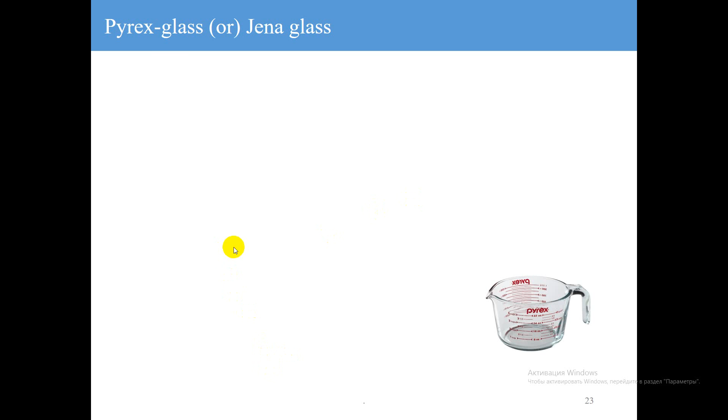Hello everyone. The last lesson on the topic glass. So let's consider Pyrex glass or Jena glass.

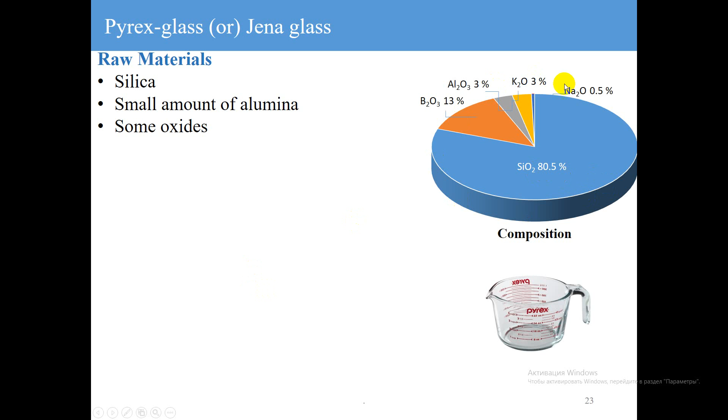Raw materials: silica, a small amount of alumina, and some oxides. Here you can see the composition of raw material and properties.

Substitution of alkali and basic alkali earth oxides of the soda glasses by boron and aluminium oxides results in a low thermal coefficient, high softening point, and excellent resistivity, making it shock proof. Of course, it also has high chemical resistance.

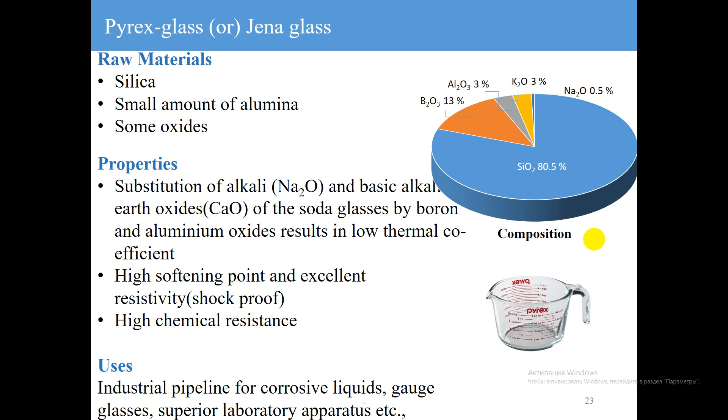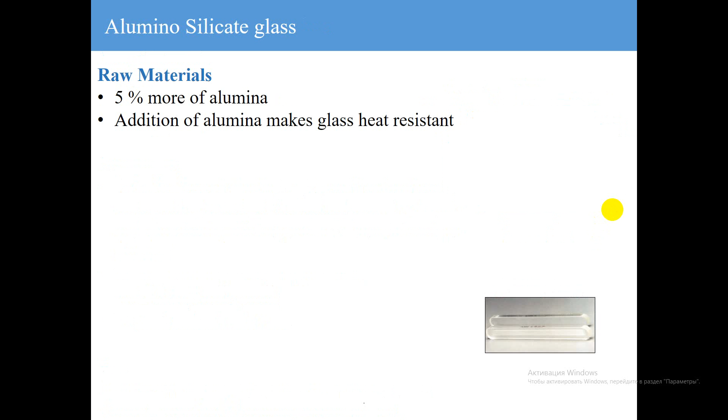Aluminosilicate glass. Raw materials: 5% more of alumina. Addition of alumina makes the glass heat resistant.

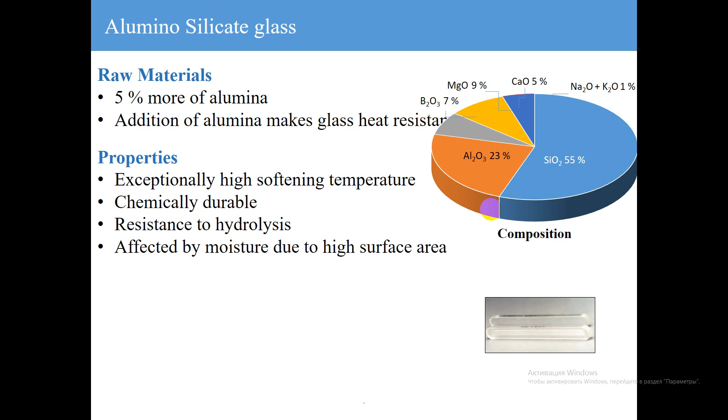Composition of aluminosilicate glass you can see here. Properties: exceptionally high softening temperature, chemically durable, resistance to hydrolysis, affected by moisture due to high surface area. Uses: high pressure mercury discharge tubes, chemical combustion tubes, specific domestic equipments, and fiber glass.

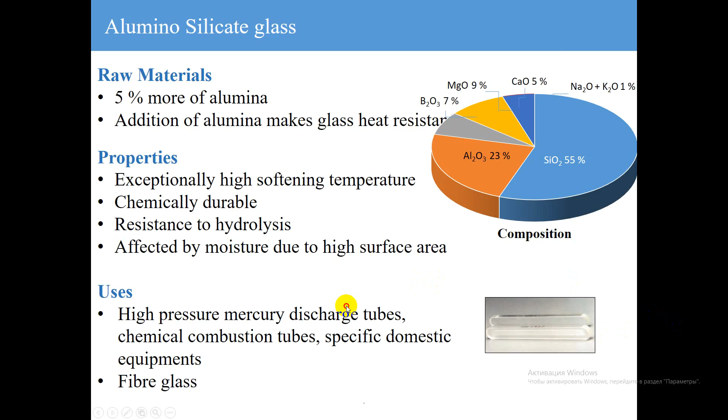Optical quartz and opal glass. Optical glass. Raw material: phosphorus and lead silicate. Properties: low melting point, soft, chemical resistance, durability lesser than ordinary glasses. Uses: optical lenses.

Quartz glass. Raw material: crystalline silica fused at 1900 degrees Celsius. Properties: outstanding resistance to thermal shock and chemicals. Uses: special lab ware, crucibles, reaction tubes.

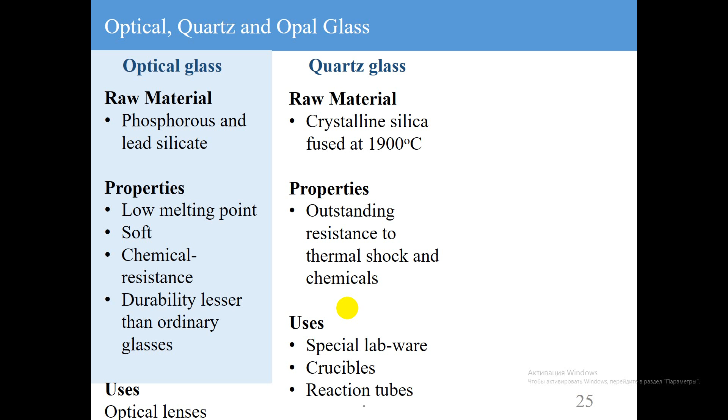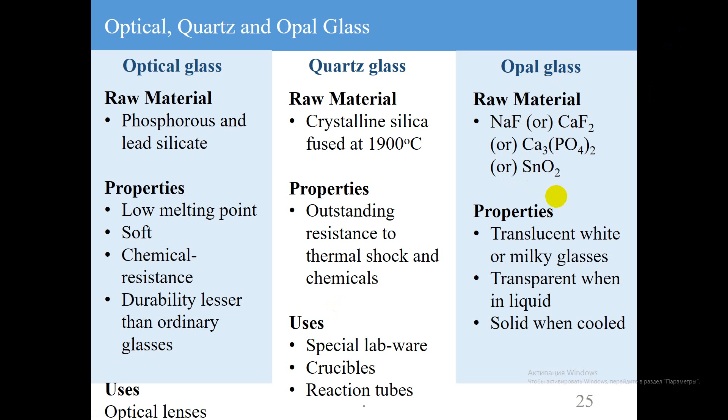Opal glass. Raw material you can see here, and properties: translucent white or milky glasses, transparent when in liquid, solid when cooled.

And now the topic glazing. What is glazing? Glazing, which derives from the Middle English for glass, is a part of a wall or window made of glass. Glazing is when you paint a thin layer of minerals and glass onto a fired or unfired ceramic piece.

The act of installing glass in windows, doors, or fixed openings. In practice, it would be the actual installation of a piece of glass within a frame.

History: glazes have been discovered to have been used in the decoration of ceramics. As far back as the early Egyptian period, powdered glass was originally used as the base of historic glazes. Minerals and water-soluble salts were added which altered the color and texture of the final product.

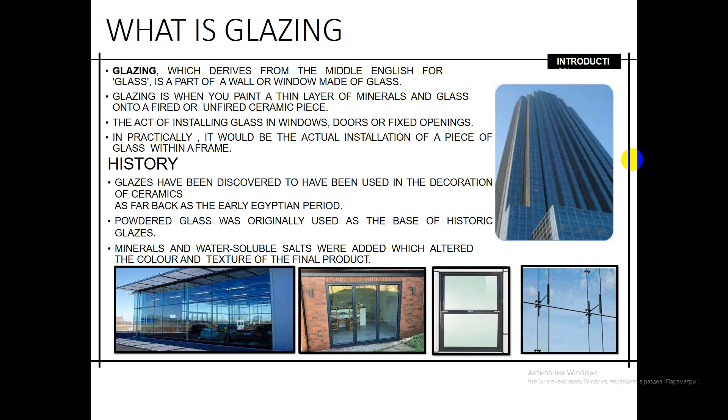Traditional single-glazed windows can be regarded as areas of weakness in many respects. We have looked at the physical properties of glass earlier, and from this we can see that while glass is not a good conductor of heat, at least compared with metals, it does have a modest value of thermal conductivity.

Therefore, heat losses through a large area of single glazing will be unacceptably large, as we now live in an energy conscious world.

Another thermal problem is that of solar gain, or the greenhouse effect. Incoming sunlight is short-wave radiation, and heat radiated back to the windows from warm objects inside the building will be longer-wave radiation.

Ordinary glass is transparent to incoming sunlight, but relatively opaque to the heat energy trying to exit the building interior. If we have large areas of windows, solar gain can make the building interior uncomfortable for the occupants, and energy-consuming air conditioning is not the desired solution.

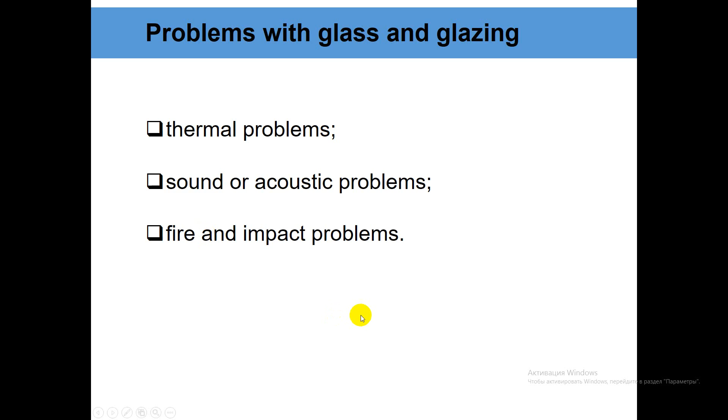Thermal problem: single glazing has a very high U value, at around 5 watts per square meter per degree Celsius, and therefore a large amount of heat can be lost through single glazed windows. However, new buildings are required to be fitted with double glazing, and this reduces the heat losses by around 50%.

The current need for energy conservation means that even a value of 2.5 watts per square meter degree is too high to achieve the very low glazing U value required by the Code for Sustainable Homes. We must have recourse to triple glazing with krypton gas infill and low emissivity glass. By this means, we can reduce the U values to 1.2 watts per square meter degree, or perhaps a little lower.

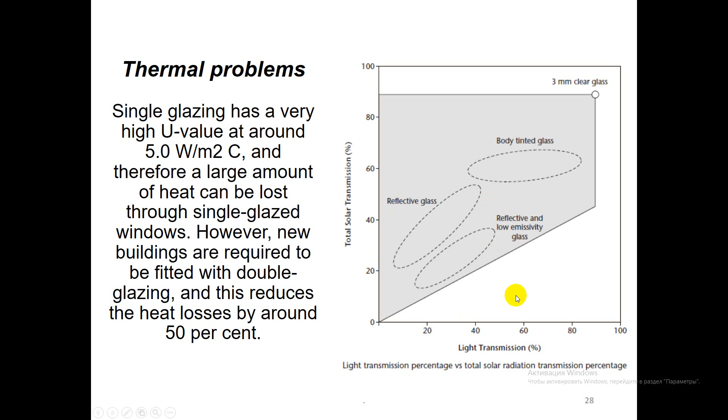The next problem is sound and acoustic problems. In urban areas, traffic noise can be very intrusive through single glazed windows, particularly if the window frame is ill-fitting. Sound insulation can be markedly improved by double glazing. Strictly, the spacing of two panes of glass for sound insulation is wider than that required for thermal insulation, but nevertheless, double glazing for the purposes of thermal insulation will deliver an impressive improvement in sound insulation too.

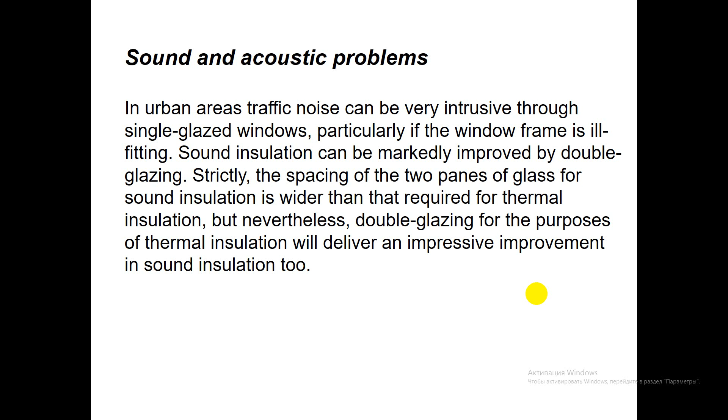Fire and impact problems. Windows are vulnerable in a fire situation because of thermal shock, which causes cracking and shattering of the glass. If a window is lost, this will enable two things to happen: flames can escape from the room or enclosure and thus spread the fire, and air can enter the room or enclosure and thereby ventilate the fire, that is, allow oxygen to reach and therefore sustain the fire. If the pane of glass doesn't shatter, heating by the fire may cause the glass to thermally soften, and the pane of glass can sag out of the frame with similar effects to those mentioned above, that is, ventilation and escape of the fire.

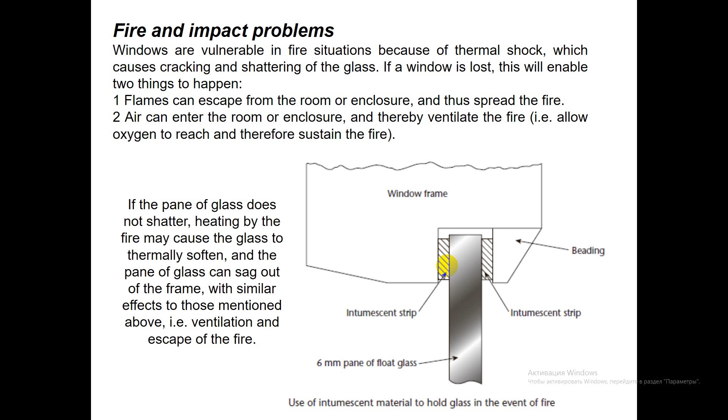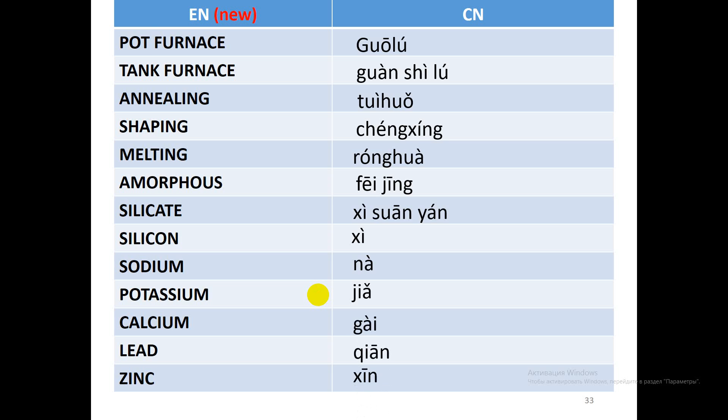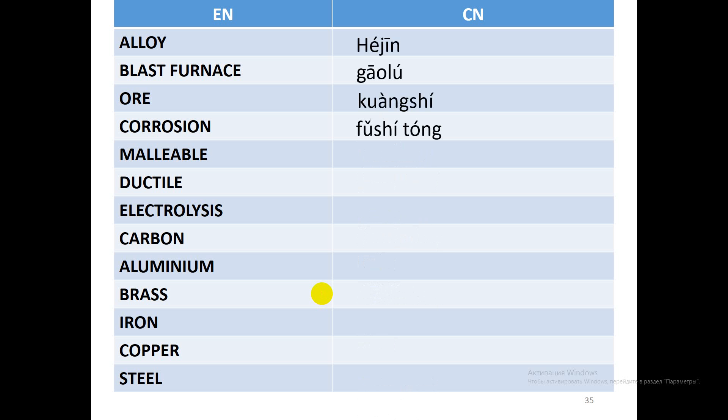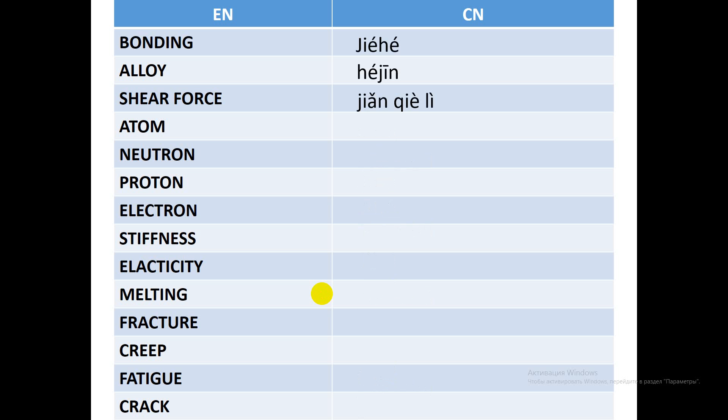Pot furnace, tank furnace, annealing, shaping, melting, amorphous, silicate, silicon, sodium, potassium, calcium, lead, zinc, lime, oxygen, acid, flint, alloy, blast furnace, corrosion, malleable, ductile, electrolysis, carbon, aluminium, brass, iron, copper, steel, bonding, alloy, shear force, atom, neutron, proton, electron, stiffness, elasticity, melting, fracture, creep, fatigue, crack.

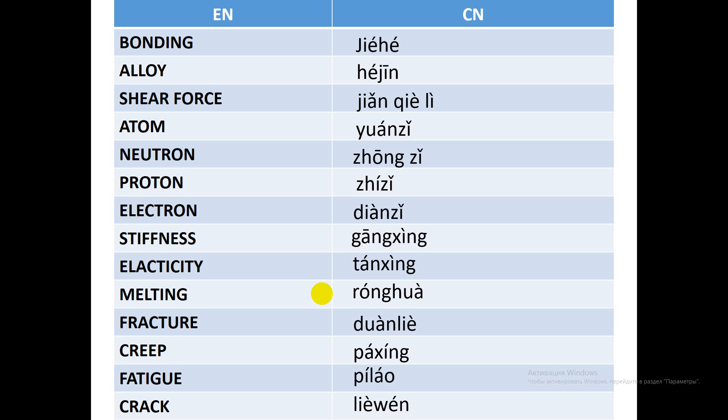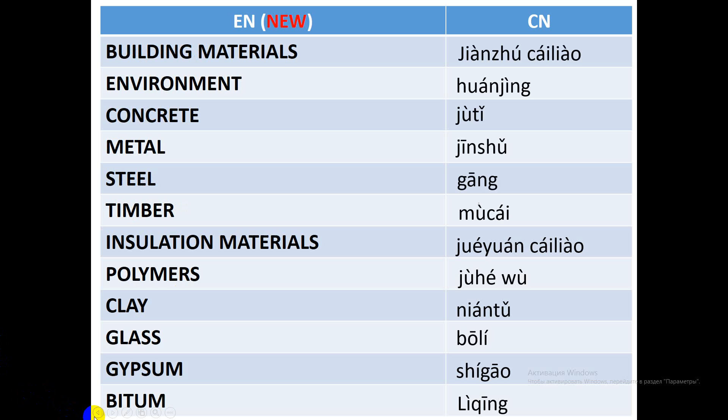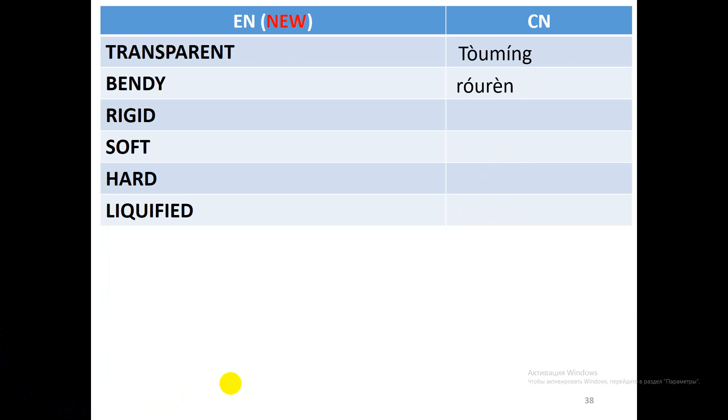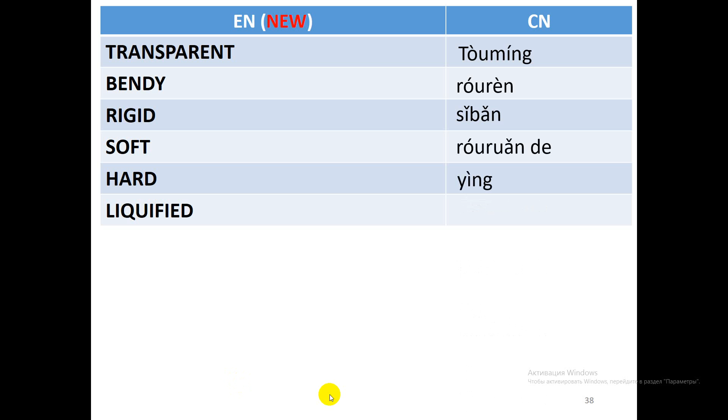Building materials, environment, concrete, metal, steel, timber, insulation materials, polymers, clay, glass, gypsum, bitumen. Transparent, bendy, rigid, soft, hard, liquefied, liquefied, so bye.